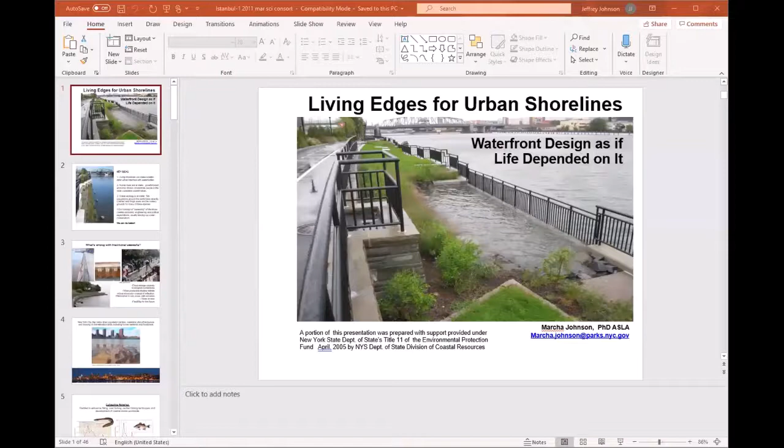I'm going to show some examples of my own work and also of others from around the world, but my main objective today is to talk a little bit about the ocean, the connection between architecture and ocean conservation.

Most architects, if they are working on the waterfront, are much more concerned about the land than they are about the water, and that's completely understandable—this is where we live, we humans. However, when we work on the edge of water bodies, we have an impact on them. With a bit of understanding and care, we can make our hard structures much more biologically rich and help support the marine life, which are our neighbors.

In many cultures, the ocean is considered our mother, and from a scientific perspective there's a lot of truth in that—it's where we all originated, the life of the world originated in the water, in the salt water. We have an obligation to recognize the damage we've done to the ocean, its fisheries, its coral reefs, all of the life that lives there, to recognize the relationship of the human world to the ocean, and to see what we can do to make it better. In many respects, when we make the environment better for other life, we make it better for ourselves.

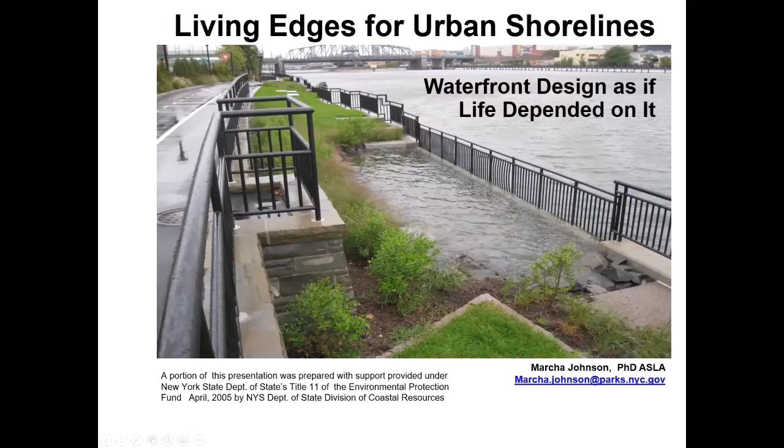What we're looking at in this photograph is a project I helped usher into existence with many partners: Harlem River Park, constructed around 2009, which includes a tide pool. This little area here connects to the Harlem River, a saltwater body. Underneath, it's all porous—gabions let water move back and forth even beneath this pavement, changing a traditional linear hard edge into one that's porous, or at least partially porous. It illustrates a variety of conditions for others to study and learn from, instead of just replacing standard seawalls.

So some of the ideas, this is the same project we're looking at. This is a little strip of salt marsh and a series of terrace setbacks, which was a dramatic difference. Even though it's a tiny little area, maybe a meter or a meter and a half, instead of having a straight line, we have a zigzag setback line. And instead of a uniformly straight vertical, we have a series of terraces, including a little salt marsh.

So looking at these shorelines that have porosity, that have green space incorporated into them, have attachment sites for shellfish, which provide habitat for fish in the water to come and nibble as they go along, and adjust the impact of wave and wake activity on the shoreline, which is a destructive force from the water, to make it less destructive, is not more expensive than doing things the traditional way.

Human lives are at stake, where many cities around the world are concentrating populations in the most vulnerable coastal areas. Ocean ecology is also at stake, as we've seen fish populations crashing around the world, and many of the nursery spawning areas where fish that we eat, and which other fish eat, have been compromised. Also, fishing styles that disturb the bottom have had a major impact on life in the ocean.

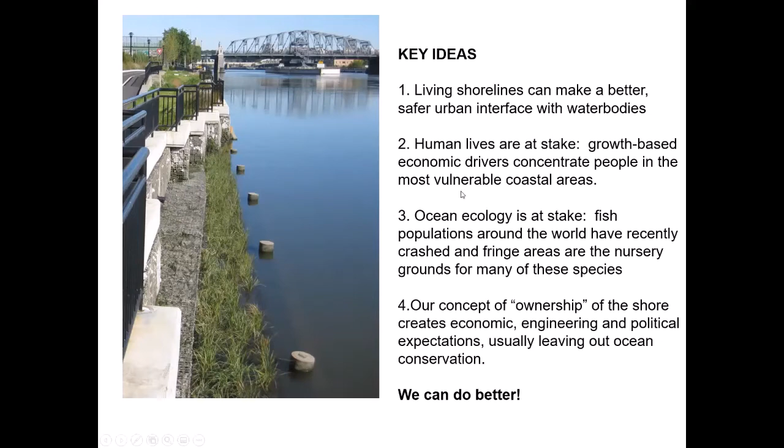So what's wrong with the traditional seawalls? These are photos from New York. This is a very typical situation: we have a hard esplanade sort of space next to a completely vertical wall, very straight, with a big railing to prevent people from ever getting into the water or touching the water. So the water is viewed around most of the city as something to be kept away from and dangerous.

You don't want to have people falling over, since it's fast moving, or can be fast moving, and if you ever fall in, there's no way to get out. In addition, the structures are often degraded, especially below the waterline, because as industry left, the people who would have maintained these for shipping are doing other things. And so these sites have been left to rust and degrade.

Even our new waterfronts—this is Battery Park City during 9/11, when people were being evacuated from Manhattan by boat—it was very difficult to even get access for a boat to these waterfronts. So it's kind of crazy: we created a whole series of structures around our waterfronts which don't serve the possibility of even using the water for access and for escape.

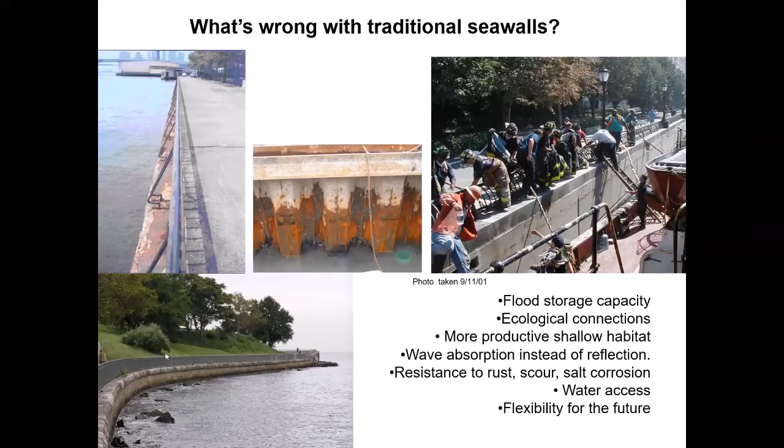And here's another typical look. We've also made our shorelines so rigid and so inflexible that the only way they move is to fall apart, to be destroyed by erosion and wave action. Whereas in nature, this type of shoreline, the edge between water and land, is flexible, porous, has a variety of levels, and is able to be a big connector between the life of the water and the life of the land. So we have these collapsing fisheries around the world.

I don't mean to be focusing on the negative, but it's just to set the stage for how urgent it is for architects and other designers and developers to think about the edges they are designing—especially something like your proposed canal. Not that you're necessarily proposing it, but the proposed canal for Istanbul.

The illustrations that I've seen about that look very harsh and hard-edged. So we have these collapsing fisheries around the world.

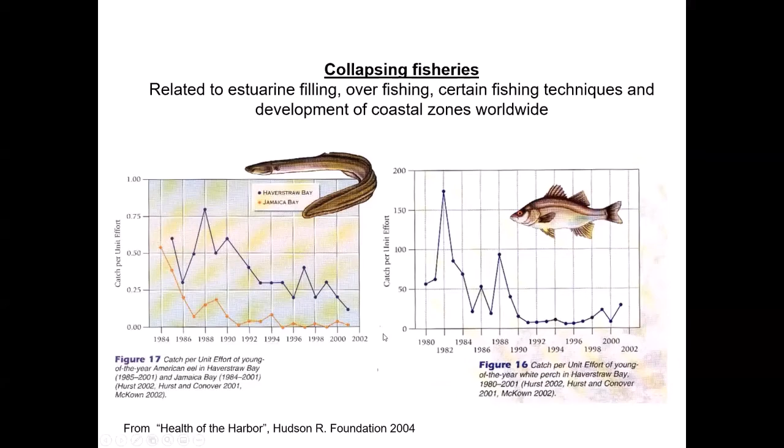These are two local fish that have gone from fairly dynamic and sustainable populations in the 80s to unsustainable populations in the 2000s. So one of the things that I did a few years ago, in preparation for doing Harlem River Park, was to ask the question, how do we do this better? And who would know how to do this? Where could we find examples for ways to have shorelines that are different and able to be more alive?

So one thing that I did was I looked for natural models, and I'm going to show you two or three of these. There's a series.

One of them is learning from beaches. How do beaches move? They're not rigid. They move around, they tumble, they're flexible materials, they're very durable. Beaches have endured all kinds of storms, every kind of possible monsoon and hurricane. It does not destroy beaches, but actually builds them, although they may move around.

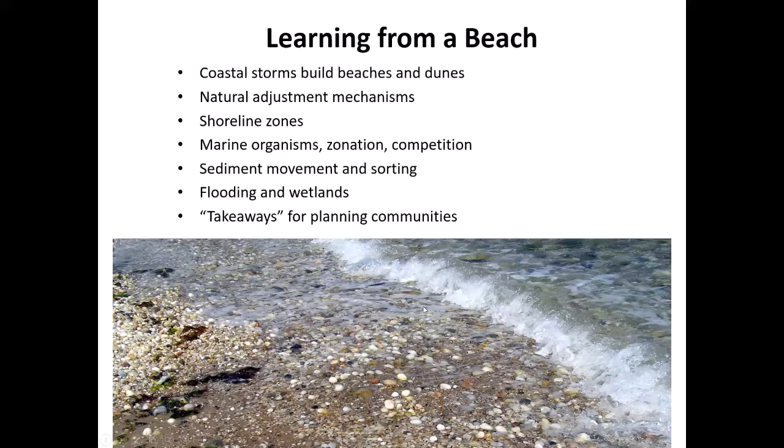So beaches have natural adjustment mechanisms, which typically are completely absent in architectural shorelines. And they're in zones. They're not all one monolithic thing. There's a lot of different types of organisms that occupy different types of zones. They flood and they have wet areas, and they're not zoned so that it's always dry or always wet. There's a lot of flexibility in the level of water, and a lot of takeaways, learning examples, lessons that can be learned from beaches.

Another thing we can learn from are shells. In a typical seawall, the water beats against the wall, and this causes a lot of reflectivity, which means the wave bounces back, and that causes a lot of impact and stress. It splashes, and it sets up a current that scours the toe of the wall. So we almost always have to barricade that bottom with toe stones. We not only build walls, but we destroy or damage or change the shoreline adjacent to it.

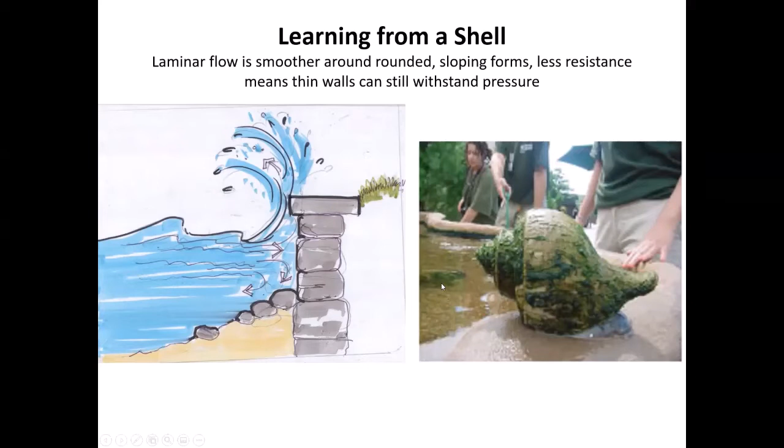Shellfish clusters, which are in the most turbulent, most stressful environments of the world, where the pounding surf is constantly adjusting and changing and aerating, but also putting a lot of force on the structures there. The shellfish that have evolved to live in these spaces have very thin shells, but they've done some clever things to make those shells stronger.

One of them is they're in fractal form, so we have little shells and big shells making clusters that are magnified at different scales. In addition, you see these little lines here - that's a corrugated system where the shell magnifies its strength by having corrugations, the way we do corrugated cardboard or corrugated metal roofs. So shells are able to, by having this shape and the way they're clustered, withstand these turbulent areas without being pulverized.

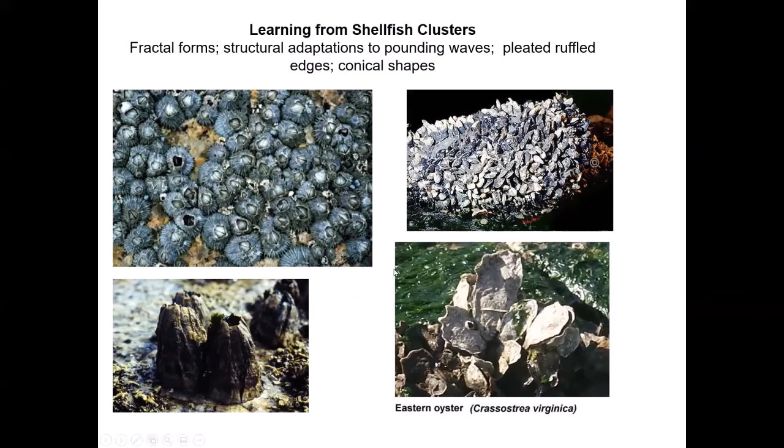And there are more examples of that as well. We can also learn from traditional cultures all around the world. There have been people living on shorelines for thousands and thousands of years. Some of those ancient cultures are now archaeological sites underwater because they were flooded out. But many cultures that evolved along shorelines learned, developed, and innovated ways to live there so that they didn't get destroyed.

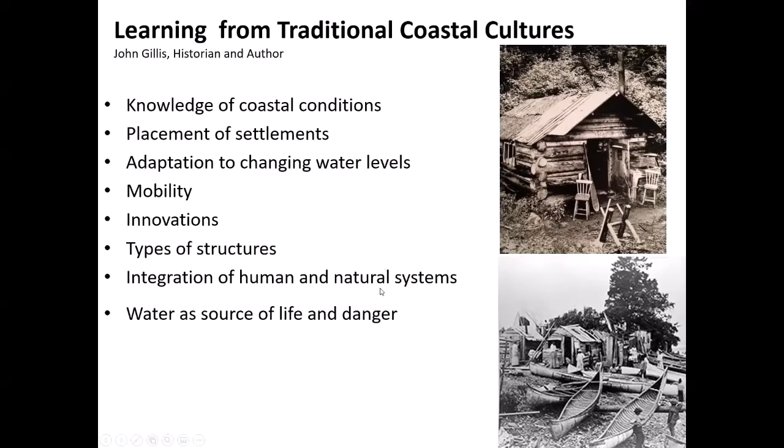And there are a lot of wonderful examples that we can look at around the world for how to live better, how to have urban environments that are not as rigid and are more mobile and more nimble and have different types of structures in the area of most stress. We can learn a lot from looking at what traditional cultures have done.

When you have wood piles, a lot of marine organisms can attach to them, not just because they're wood, but because they're rough and have soft enough structure that organisms can get a foothold, a handhold on the wood. So there are other materials we could use, which are not as vulnerable to decay, but have some roughness.

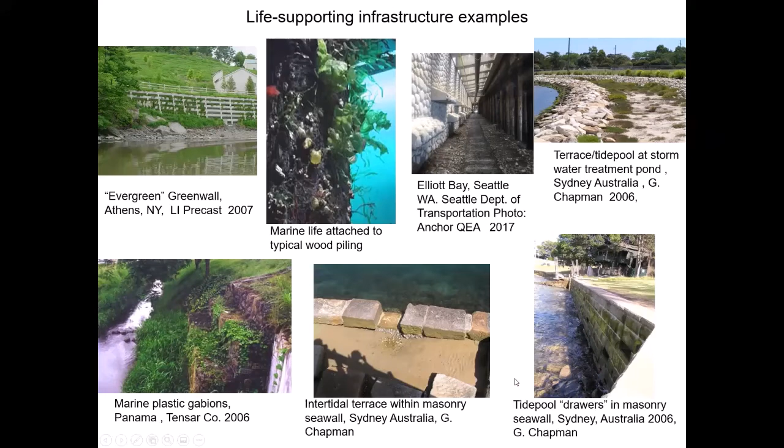This is in Sydney, built into a seawall where there's a little tide pool that allows shallow water and sediment to occupy space as part of the wall. In that same general area, there are pockets in these walls, like drawers in a chest, where there are tide pools back in that little shady pocket. So even though the wall is not compromised at all, it has the ability to support starfish and other marine organisms that would otherwise occupy voids and little caves in a natural rocky wall.

These are called oyster castles, and they're concrete structures that encourage oysters to grow on them. They're being used to create living reefs and also to protect some shorelines from wave action.

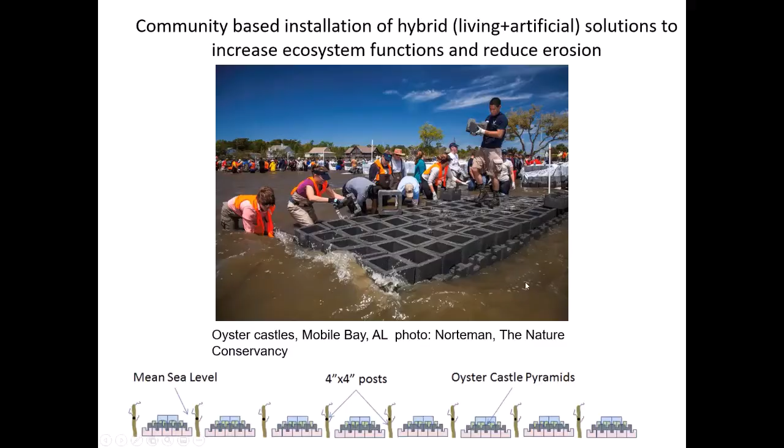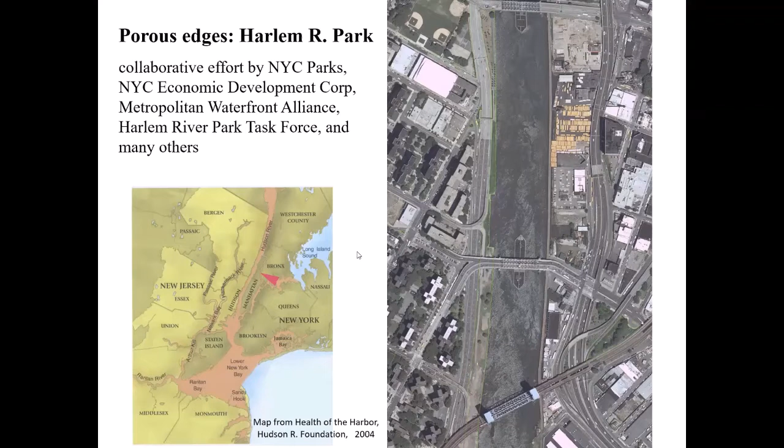And we were asked to take a look and rebuild the shoreline. As an opportunity, we took this to try to do an experiment to see what kind of porous edges could be used to replace the standard steel piling that was there before. So what's the big deal about porous edges?

In a natural floodplain, the water is in the river, but also underground—this is a groundwater table. As the water level changes in a tidal cycle, the water in the upper portion gets saturated and unsaturated, constantly going up and down. There are a series of terraces along the edge so that the water is not one constant depth.

When we urbanize or make that into a canal, we harden the edges, we stop this interface exchange with the groundwater storage area of the ground, and we make this all high and dry. So all of the water is contained, and when it floods, it spills out over into the adjacent areas.

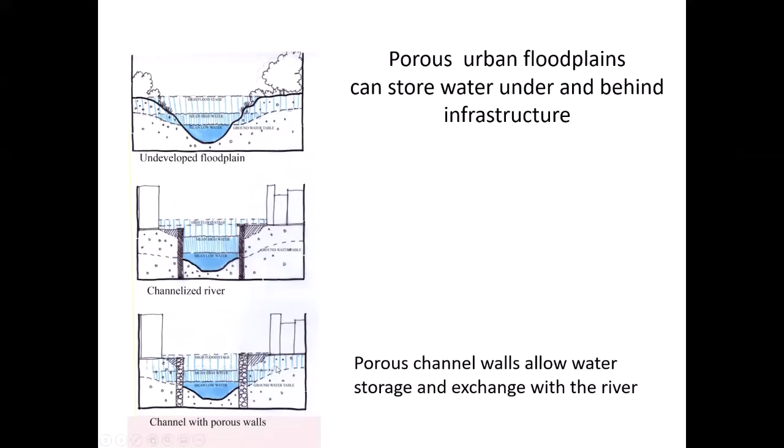A way this can be overcome, making better use of the potential flood storage area under the city, is to make these walls porous. You still have the ability to have shipping, but instead of resisting the water, you allow it to come back to something more similar to its natural state.

Looking at Harlem River Park and the possibility of different types of shorelines, I collaborated with a marine engineering team from Stevens Institute to help build some models of what different possibilities could be like. Then we tested these models in a wave tank, which is usually used for understanding how boats move through water and designing naval architecture. In this case, we had a model builder build plastic models that we could pull through this wave tank and see how water responded to them.

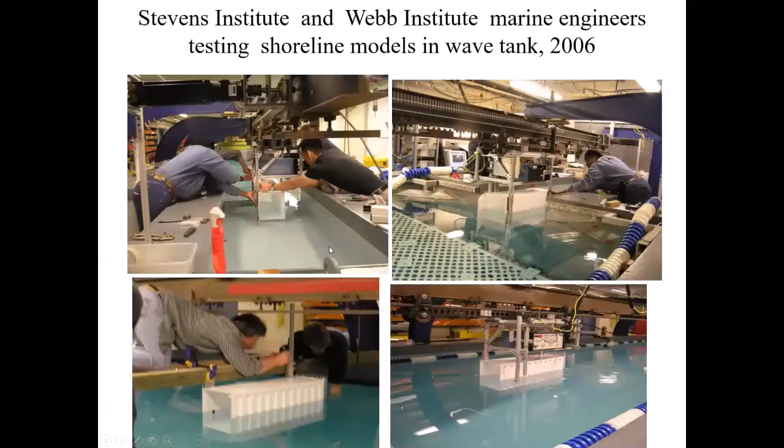So here we are in the wave tank. This was at a place in Long Island. The wave tank is a long, like a swimming pool of constant depth—a long pool with a whole lot of fancy equipment over the top of it. We attached our model to it, and to simulate the wave action, there's a paddle at one end that causes waves. You can move the model along this track with all kinds of wires to see how the water velocity changes along it, and analyze its interaction with the water.

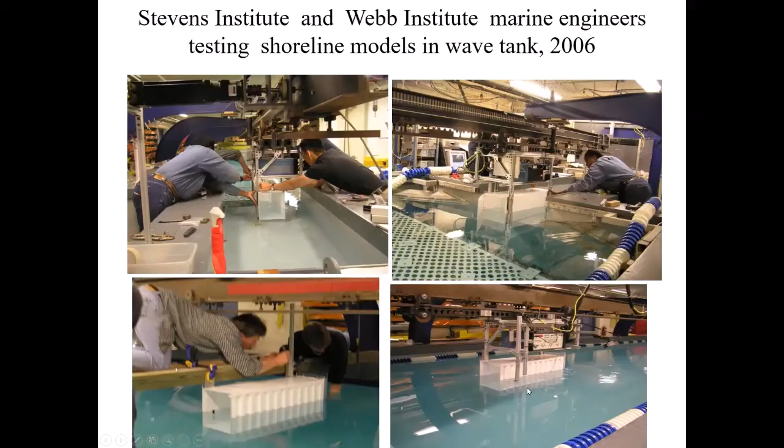So the take-home message of this was that here we have a wave coming in, splashing against this terrace wall, which became our gabion system.

They released dye into the water to see how the flow would change. This is a demonstration of the area that you'll see in a second as it becomes the terrace tide pool area. The dye will pool in that little cove instead of just moving by. So it slows down and collects in any area where the vertical seawall has been changed to a shallower area, which breaks up that linearity.

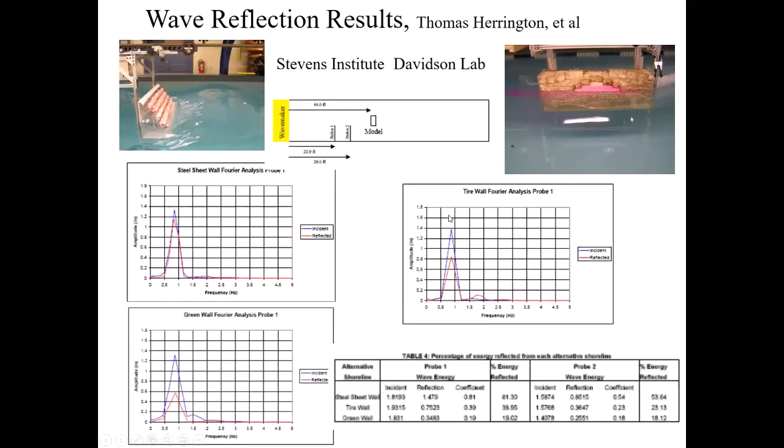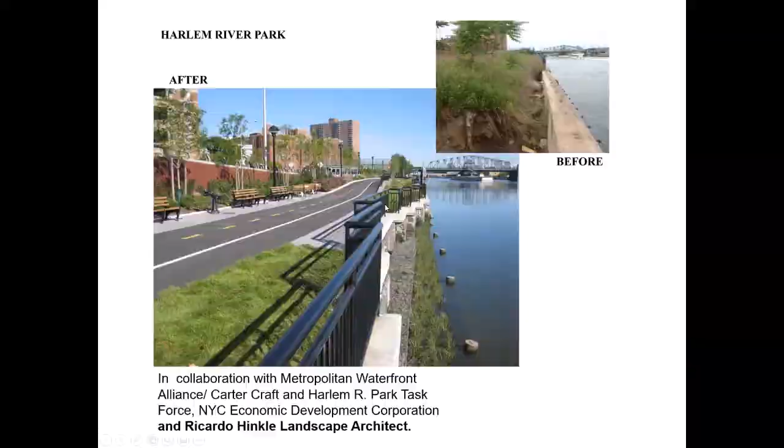We also collaborated with another agency to do a second section of Harlem River Park. So this is where the river is, and this is the area where we planned to do what's called a green wall, which you saw a minute ago. It's a stack of concrete open frames, and that was accomplished by our sister agency.

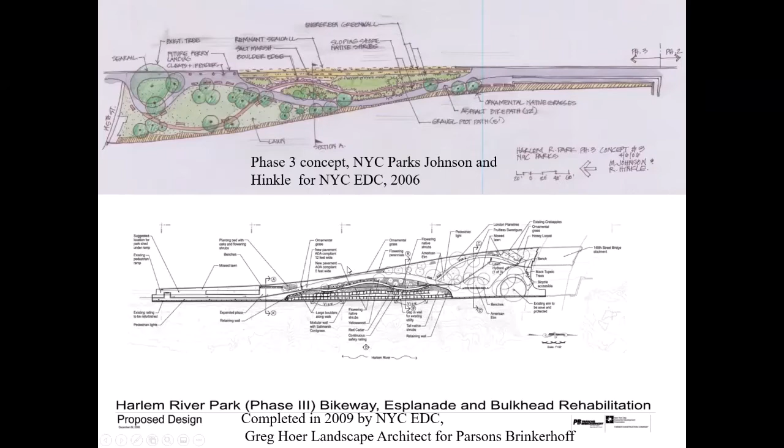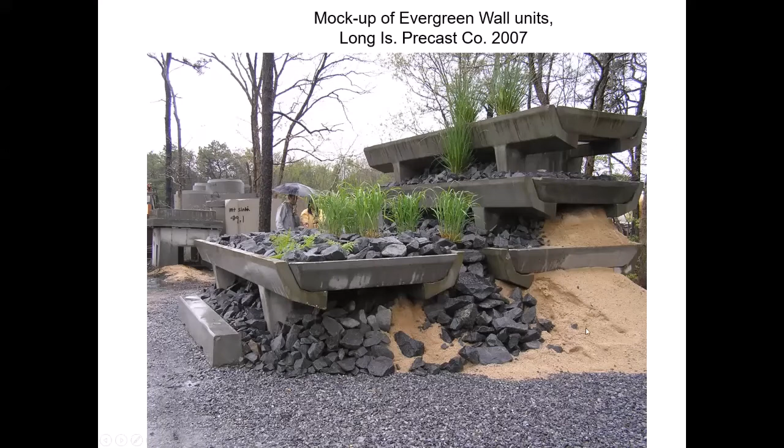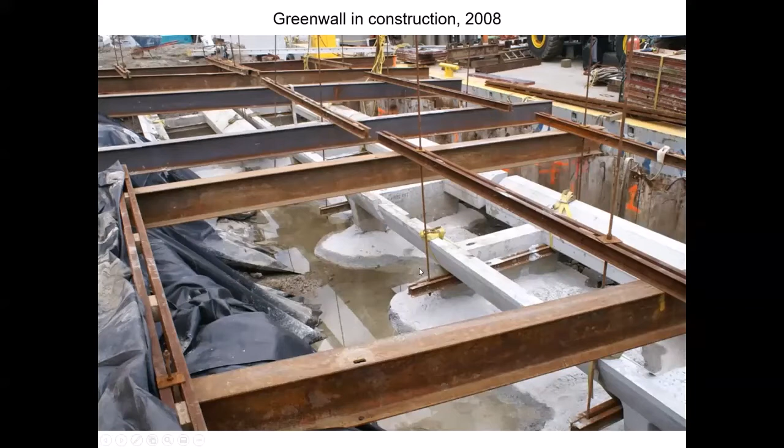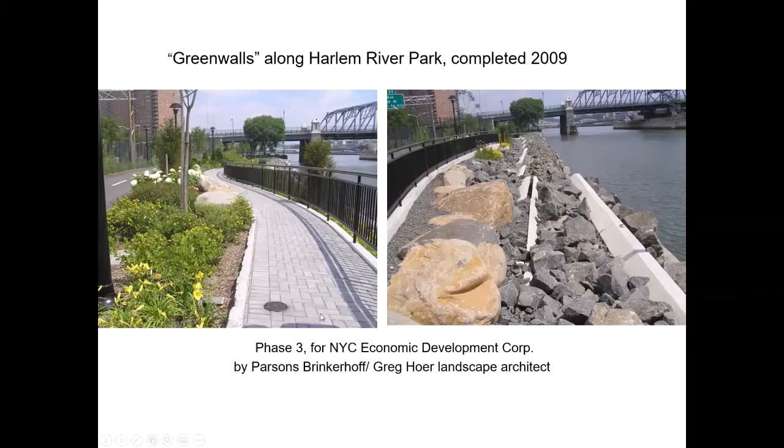We also looked at the idea of tidal pools. So in a nutshell, the community in this area of East Harlem are primarily African American and Latino, and they did not have a tradition of swimming, of learning to swim, of teaching their children to swim, or swimming in the rivers or even in swimming pools. They were very afraid of the water, and most of the adults as well as the children did not know how to swim.

So they did not want to have access to the water. They did not want to be able to get even their toes wet because they're afraid of the water. It had been kind of culturally imposed upon them that the water is dangerous, which it can be, but it's also not always dangerous, and it can be a great source of recreation, and it's just part of the world of our waterfront city.

So we looked at examples of tide pools. This was a suggestion from a brilliant artist, Jackie Brookner, to look at doing tide pools, which are safe. You can dabble your feet in them, and you can look at the organisms that live there without a fear of drowning.

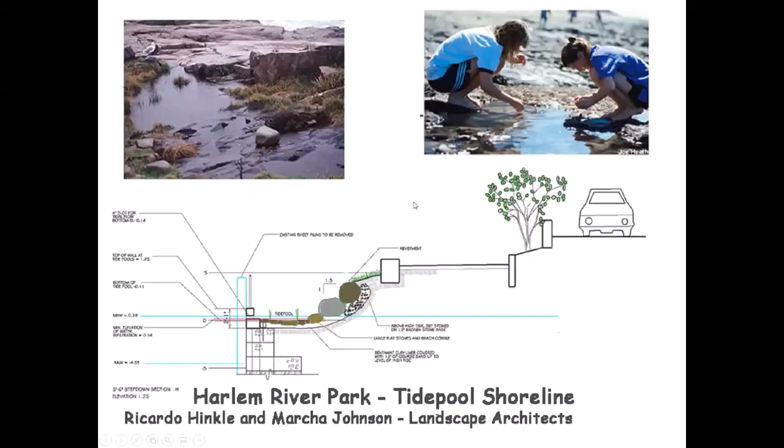So here we are in construction, digging out the area behind what would have been the standard linearity of the wall, making a shallow area. There are slots in this wall so that when the river water rises up, it fills this up to about 6 or 7 inches. And then when the water is at low tide, this is dry. So it's an alternating wet, dry condition like tide pools are.

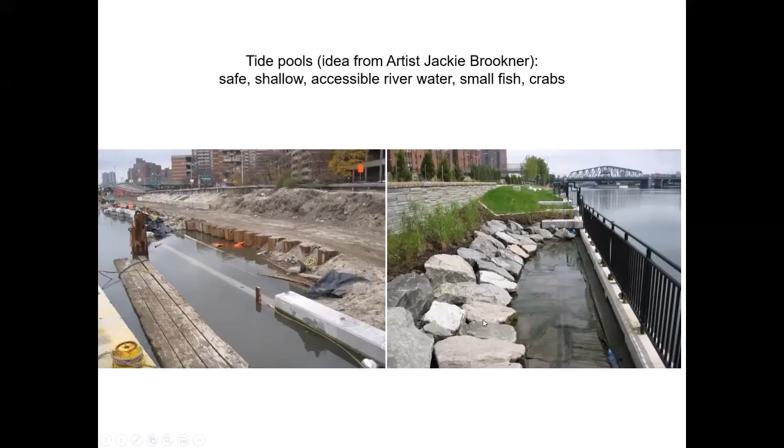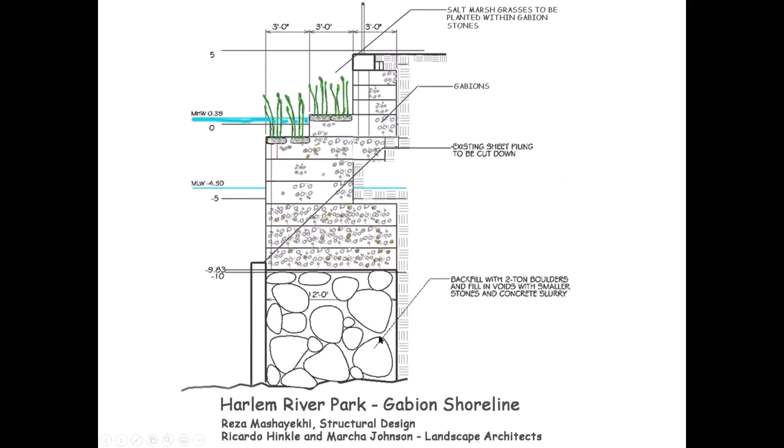We also looked at using gabions as porous edges. This is a structural detail of it. It needed to be able to sit on the mud bottom without sinking, so one of our engineers developed an idea of creating a footing for this using boulders and marine concrete. And that's what that looks like in construction. We left the old seawall there to help keep the water out during construction, more or less.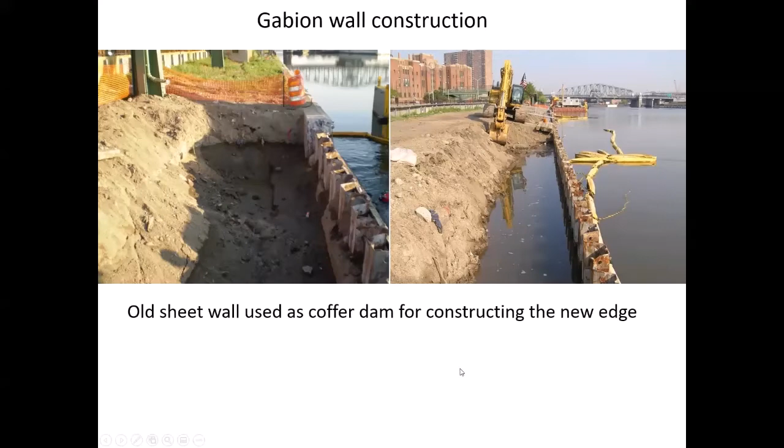It was constantly being inundated and constantly being pumped out, but it did help to have that to break the wave activity while we were under construction. Here they're building the cages of mesh.

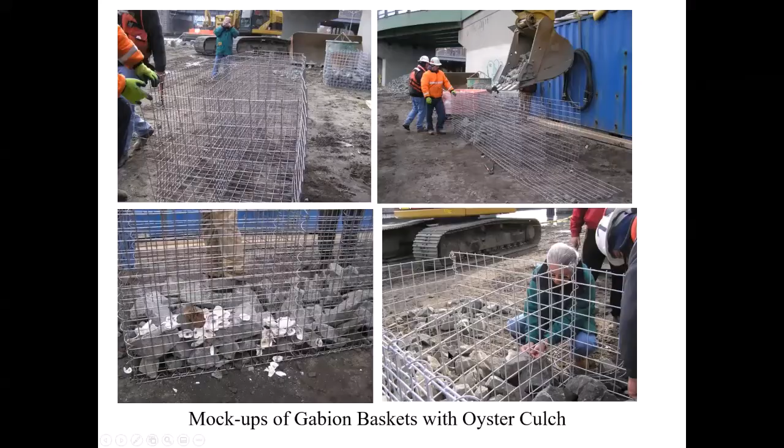In addition to rock, we also placed shell to encourage shellfish to attach to other shellfish, and they were hand packed so that there's minimal abrasion against the wire edges. Here we are in construction, and there it is in the finished design.

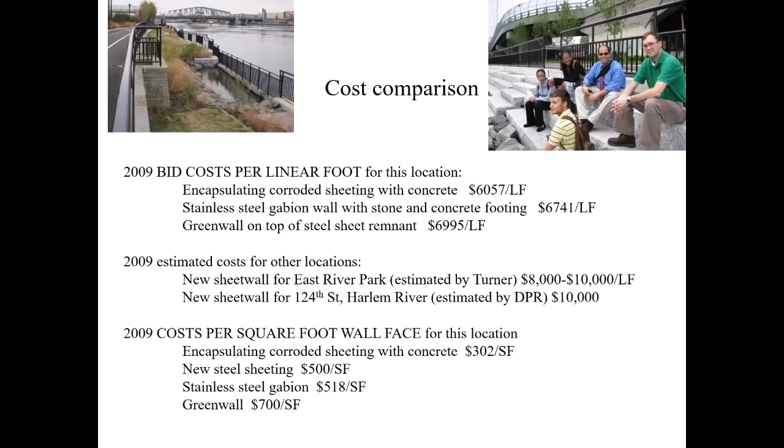Everyone wanted to know, was this more expensive than doing a traditional concrete or steel wall? The answer was no. If you look at the square footage of the face of the wall, it's right in there with our traditional methods. And if you look at it from other aspects, like ease of construction and flexibility and the ability to do it in modules, it could be even less than a traditional method.

So I'm going to talk now for a little bit about adding ecological enhancement to hard structures, which is something I'm currently working on with our engineering group. We have a series everywhere, you see these little push pins, marking either a current or a future project to rebuild collapsing infrastructure along our waterfront. This is Harlem River here, and this is what's called the Upper East River.

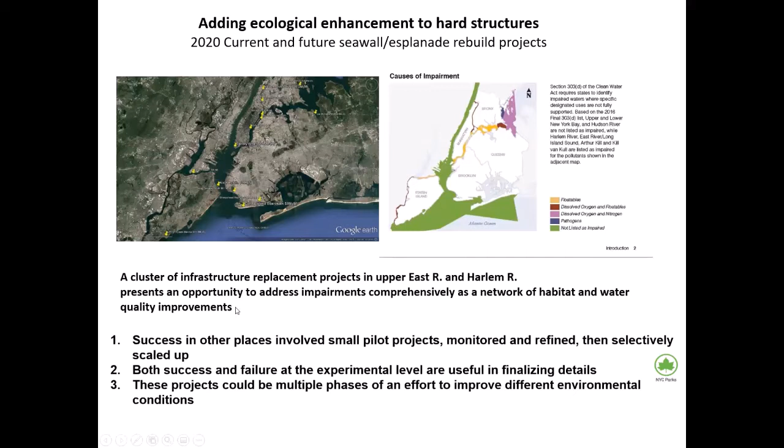For the most part in New York we have fairly good water quality, but in these areas there is impairment from low dissolved oxygen during portions of the year when it's hot. So we have this cluster of projects, and we're looking at doing a series of innovations where we add ecological enhancement to traditional piles in different ways along different sites, so that collectively we'll have a demonstration of a variety of conditions and projects and add-ons that we can evaluate and compare and see if we want to scale it up for future things.

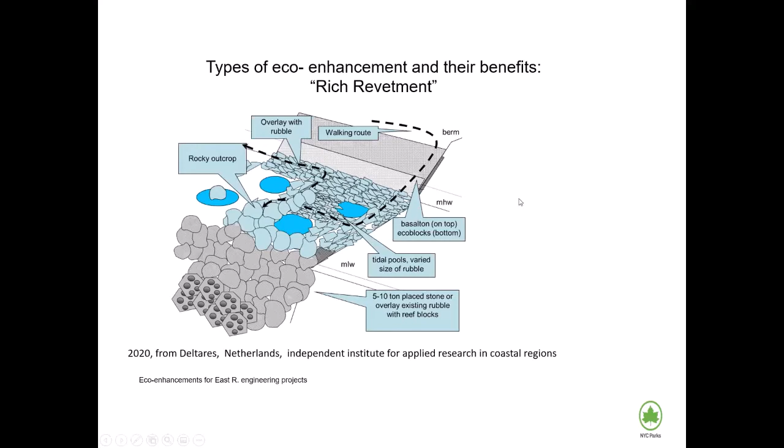Some of the ideas are from other places. This is from the company called Deltares in the Netherlands, to add what's called rich revetment instead of just a standard stone revetment, adding plates that have holes and textures of different shapes and materials. I can send this as a PDF to Zainab if you want a copy. Anyway, there's a variety of ways to change the standard riprap to a place that is more inhabitable by organisms.

There's another material which is in the market right now, developed by two marine biologists from Israel, called Econcrete, and it's a concrete formula that weathers into more benign materials in ocean water than standard concrete, and has a pH that's closer to shellfish, so it attracts marine organisms to occupy them.

So these are some time-lapse photographs of the same tide pool over the course of a few months, showing how it develops a living crust.

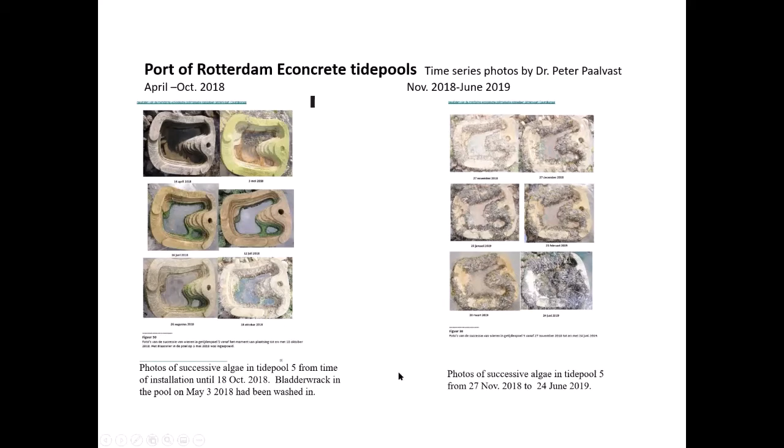At Brooklyn Bridge Park, the same Econcrete was used to wrap piles with forms that have lots of texture on them, and then fill the inside of the jacket or form with Econcrete, and take the forms off. They can be reused many times.

Compared with standard piles, this is what those look like. Standard piles would still be looking kind of like this with very minimal attachment. But these concrete piles with lots of texture, over just a few months, immediately developed a living crust of marine organisms that support the aquatic environment.

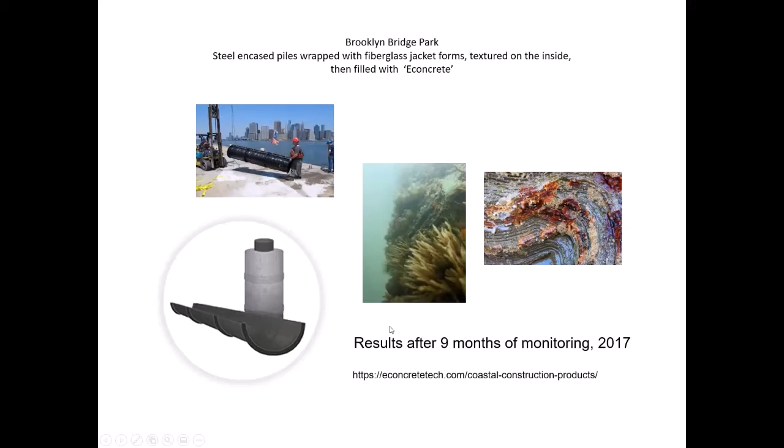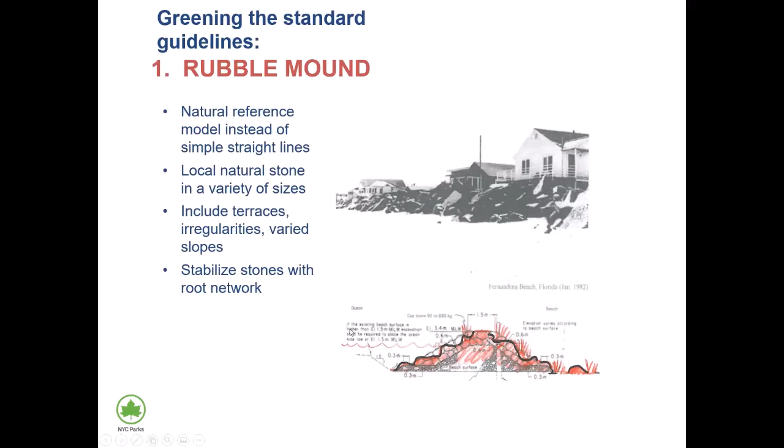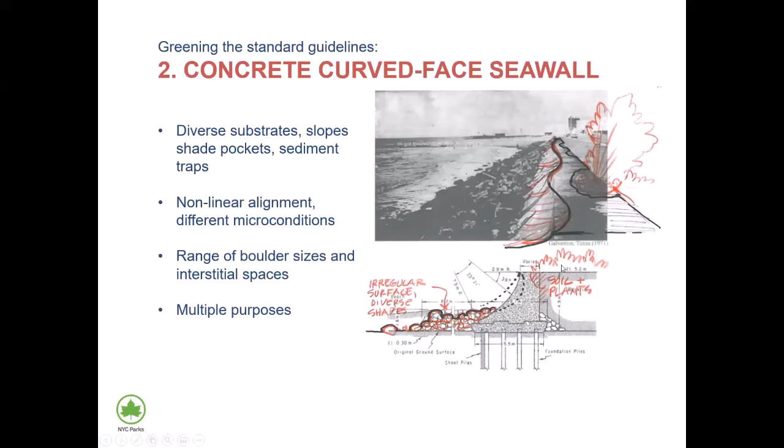A couple of ideas are just changing the shape of it so there's variety, and adding pockets so it can be full of plants instead of just bare rock. Another thing people are increasingly looking to do is more concrete seawalls. Instead of having just a straight seawall, one way this could be made more biologically useful is by changing it to curvilinear, which makes more pockets and more micro conditions than a standard straight line, making pockets without compromising the effect of the wall, so it can be full of plants instead of all concrete—making it multiple purpose.

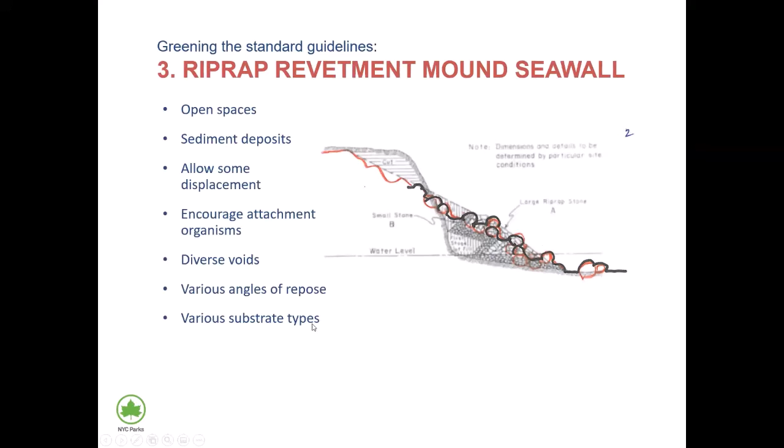Looking at changing standard revetment to one which has a variety of different sizes and shapes and pockets of voids, different kinds of voids, different angles of repose—various substrates will also give it more micro conditions.

Lastly, a project my students worked on a couple years ago in Newtown Creek, which is a tributary to the East River, so saltwater again and tidal again. There's an old building being used for new manufacturing and startups right next to the canal. This was all collapsing, so we looked at ways to rebuild this edge to make it more green—ideas about having set pockets built into the wall, making it available for humans to enjoy and walk along, and increasing the porosity of it.

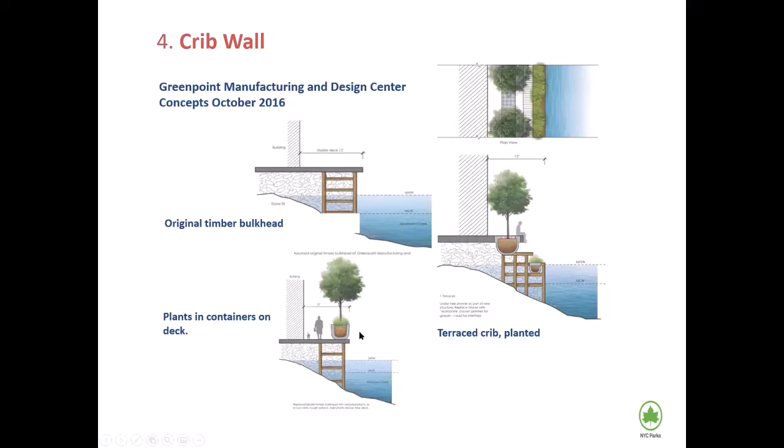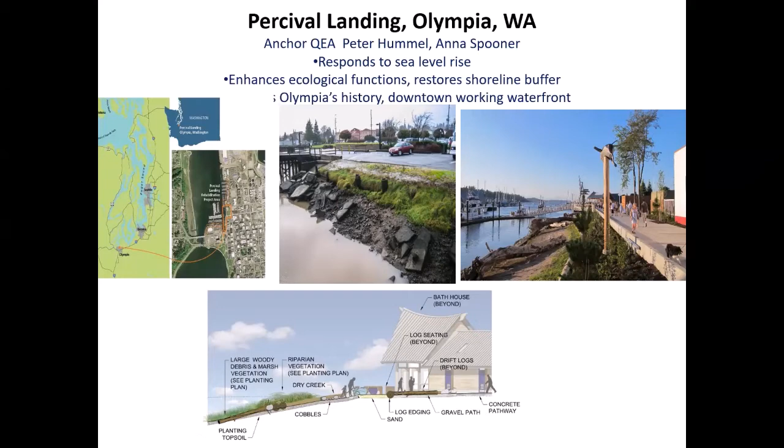One of the things we're dealing with in the United States and many other places is the fear of water as being the enemy, to be kept away and separated from us. Getting beyond the language of fear to respect it, to understand how it works, but also to enjoy learning about it, is a critical part of changing the way cities deal with the neighbor they have—the water on the other side of the waterfront.

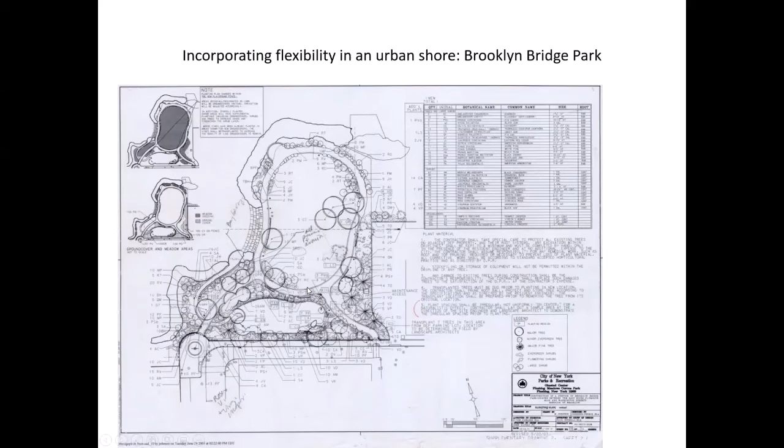A couple of other projects I've been directly involved with: one was incorporating flexibility in an urban shore. Many urban shores need to be rigid for a variety of reasons, but there are places too where you can build in pockets of flexibility. At Brooklyn Bridge Park, the first phase, done in the early 2000s, we allowed for rigid, hard, rocky edges, but created a section with a flexible beach. This is a planting plan showing the conditions that set up this beach, which is bounded by a series of stone terraces—and that's the beach.

It was one of the very few places where people in Brooklyn could actually walk down on this side of Brooklyn, dip their toes, look at the water, and be in an area where you could put in a kayak.

This is the terraced stairs behind it. There's the flexible beach, and it has moved around quite a bit, changed its position. We've put a lot of shells on top of it to create different sizes of voids. The shells got walked on quite a bit. New shells are being thrown up every now and then because there are active shellfish beds out here, but it's not covering them. This corner of it has shifted around. So it's been a great example of having a blend of flexibility within a rigid, more typical urban edge.

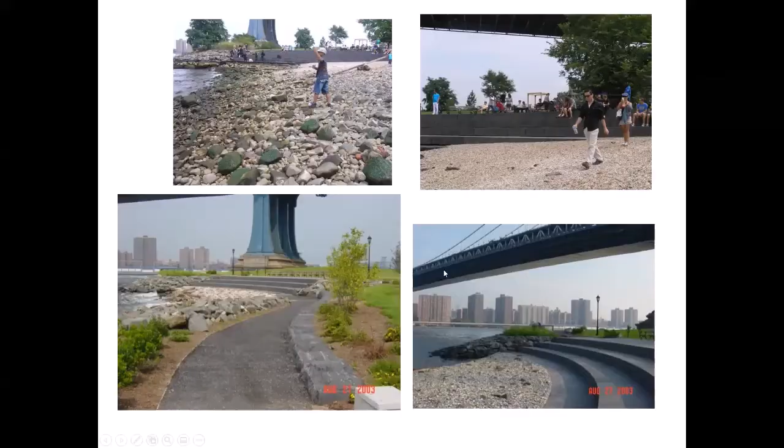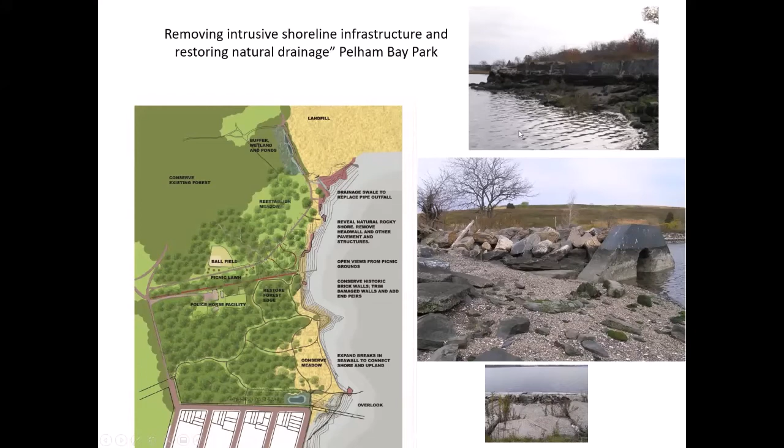So this is it under construction, nearly done. This is where that pipe was, and now it's an open channel. Here it is closer to high tide. Again, this is still in construction, and we have a section of it which is an archaeological site that needed to be protected, so we made a boulder wall over a portion of it. In order to provide access across this open channel now where the pipe used to be, we now have a little culvert bridge. And that's what it looks like flowing.

One of the collaborators on the book Coastal Change was Dr. Sylvia Earle, a notable marine biologist with interest around the world in creating and protecting hotspots of biological activity in the ocean. Her wisdom brought into the ideas of architectural addressing of shorelines includes the idea that the ocean is deep and expansive, but it's not infinite, and we humans need to take a much more active role in protecting it, with care and global action, because of course the oceans touch on many jurisdictions, many different countries, many different cultures. So it requires global action.

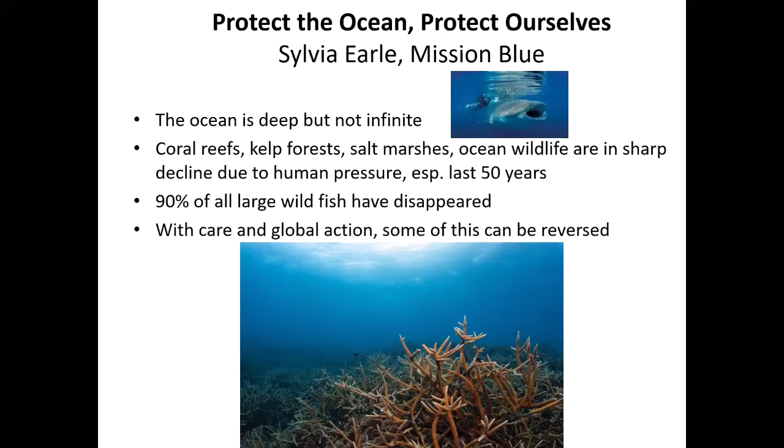Some of the ways to create living urban edges: roughen the surfaces. Change it from standard, simple, straight, vertical concrete and steel to forms that have shallow water, different types of voids, different types of materials that can support aquatic life. Reduce wave energy with porous areas and use durable but flexible materials instead of less durable, rigid, cracking materials that will just be destroyed by the water. Let's look at materials which are not destroyed by water movement, but which are flexible.

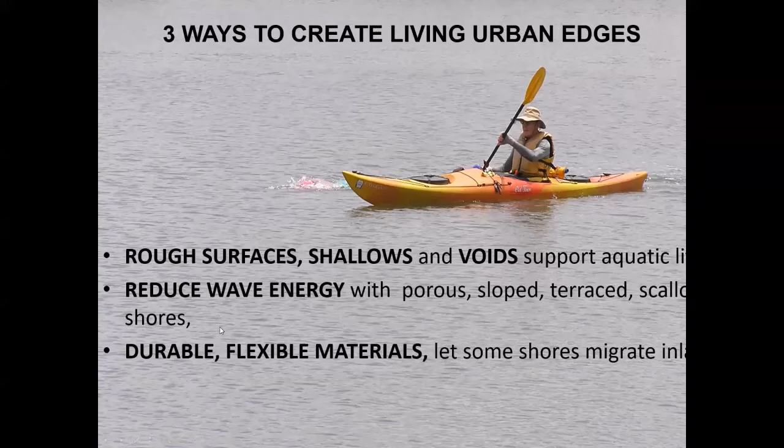So now I'm going back to open this for conversation.